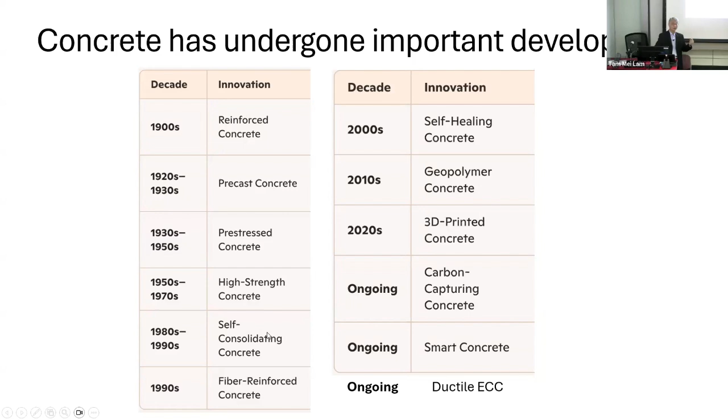Possibly reducing or even eliminating steel reinforcement in certain circumstances. So let me answer the question: well, we have steel reinforcement, so why bother? Why worry about tension? Well, we see in these pictures collapse of buildings under extreme loading, large earthquakes.

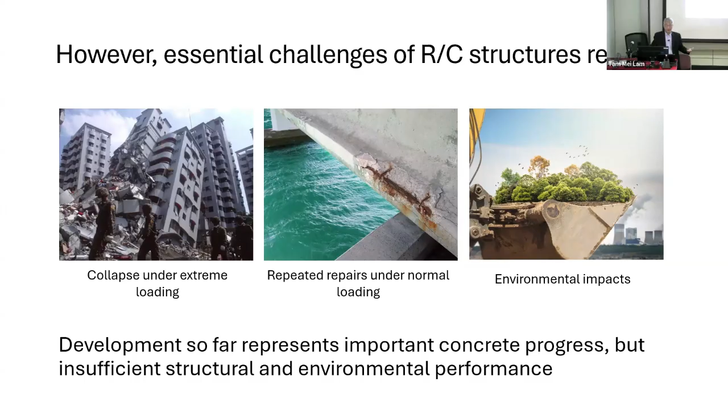And in more ordinary times we see this kind of deterioration of reinforced concrete. As I mentioned, nowadays we are very concerned about carbon emissions. So these problems remain, even despite the fact that we have a lot of developments, but the fact is concrete remains brittle. So what does brittleness of concrete bring to us or cause us in terms of problems?

I mentioned earthquakes, so you can see here actually a shear crack in this supporting pier on the lower floor of a building, despite the steel reinforcement inside. You obviously do not want to live in this building where the earthquake happened. And on the right-hand side here, you see this kind of cracking on floor slabs is very, very common.

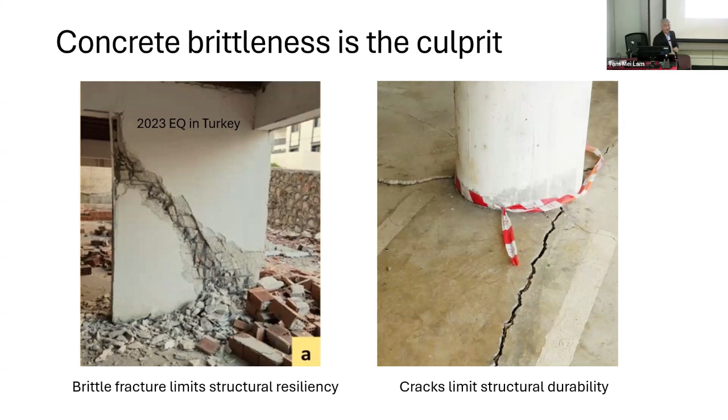And then water, or in the case of US, we use a lot of de-icing salts. That chloride ion goes in and attacks the steel and causes deterioration. So we have, on one hand, issues with the lack of resiliency in our infrastructure and the lack of durability. These are two important issues that we need to address if we are going to further advance our field.

So what we set for ourselves as a goal is to develop a new modern concrete that exactly attacks this brittleness problem of concrete material. Can we make a ductile concrete?

To be honest, I was told many times when I was in my younger days as an assistant professor that, 'Professor Li, you are being stupid. You're wasting your time. This is foolish. Concrete has always been brittle. Thank you so much. And you can't change that. That's the fact of life.' Again, you'll be the judge.

And you can answer that question later on, towards the end of the seminar, to see if we have succeeded in creating a ductile concrete. Now, what I want to precede before showing you the ECC in details is to say a few words about material development testing.

So we want to make sure that the concrete as a material is tested under conditions as close as possible to near-field conditions. That is more realistic.

So for example, in contrast to that, very often in laboratories, we see permeability study of intact concrete—a disk of concrete in the lab—trying to create a hydraulic pressure, force water through and collect on the other side. That is a measure of permeability, all right, but does it represent reality?

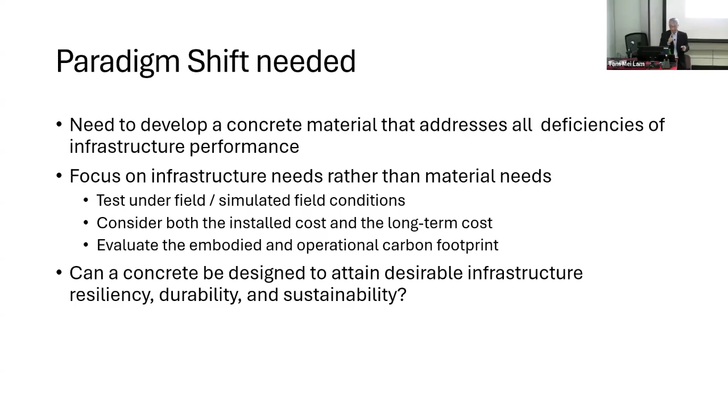So the question is, and you might think this is obvious, but if you look at research work done around the world, most research are done for just one of these three things, and that's not very good. We want all three characteristics enabled by one single material for infrastructures, leading to infrastructures that are resilient, durable, and sustainable.

All right, so here is the ECC that you have been waiting to see, if you have not seen this before. This is normal concrete, brittle under bending load. So you have elastic behavior and suddenly it fractures into two pieces. We are all familiar with that.

But in ECC, you actually allow the material to undergo plastic deformation. I put it in quotes because it's not actually like steel plasticity, but it is damage tolerant. If you look very carefully on the underside of this slab, there are micro cracks on the bottom. So the material is damaged, but despite the damage, the composite remains load carrying. It doesn't give up.

In that sense, it looks like metal plasticity, because after you have bent steel beyond the elastic stage, it can still have load carrying capacity. That's one of the reasons why we value steel as a structural material, it can go beyond the elastic stage. Now we have been able to create an ECC, a new version of concrete that has the same kind of behavior.

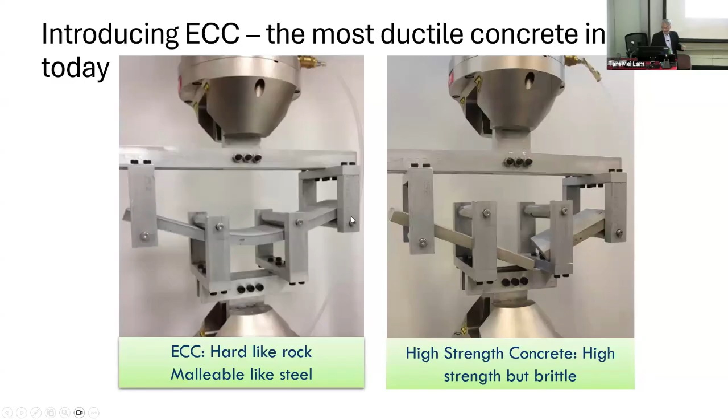If you look from the viewpoint of a tensile stress strain curve, a specimen loaded in direct tension, a piece of concrete will behave elastic, and then suddenly the crack forms and the load drops to zero, completely giving up load carrying capacity. If you put some fibers, fiber reinforced concrete, which has been around for years, you have this tail, a tension softening where a crack opens up, and as it opens, fibers bridge across, and they often break or tend to pull out, so the load carrying capacity continues to drop as the crack opens larger and larger.

In ECC, we have this funny behavior. You have an elastic stage, and then it undergoes strain hardening, tensile strain hardening. Despite the damage shown here, the material's load carrying capacity continues to rise. How far does it go? For this illustration, it shows about 3 to 5%. We can actually do even more than that. 3 to 5% is very large strain deformation, that's the reason why you saw that bent specimen smiling at you in that shape, because the material can undergo very large deformation.

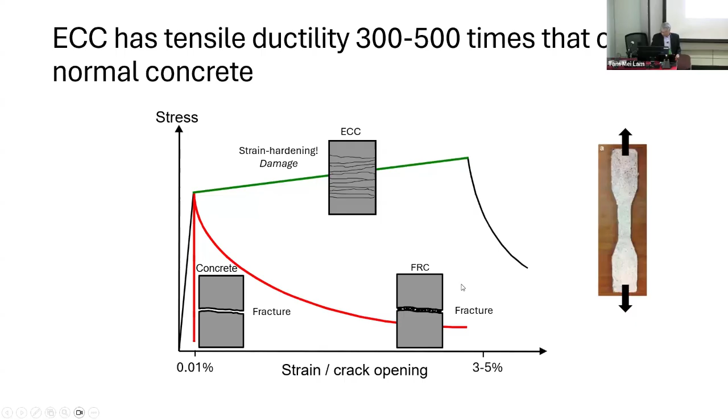Compared to normal concrete or FRC, which undergoes softening or sudden collapse at 0.01%, we are talking about not just a few times more ductile, but hundreds of times more ductile. So this is what we call tensile ductility, a ductile concrete. We have a stress strain curve that resembles that of ductile metal undergoing strain hardening behavior. All right, so that was an illustration of curves to compare different materials.

This is the actual test curve of one ECC material. This is a normal strength ECC, which shows about 4% tensile strain. I also included a UHPC material, which has higher tensile strength and compressive strength, reaching about 8 megapascal before it fails. When it fails, it shows very rapid softening, better than normal concrete because of the steel fiber typically included in UHPC.

So the value of this is very high compressive strength. We were often asked, can you actually make high compressive strength ECC? And the answer is yes. Several groups now, beyond our own research group, have worked on this. This picture, I believe, was taken from a group at Tongji University. But there are many other groups now that have been able to produce ECC with very high compressive strength.

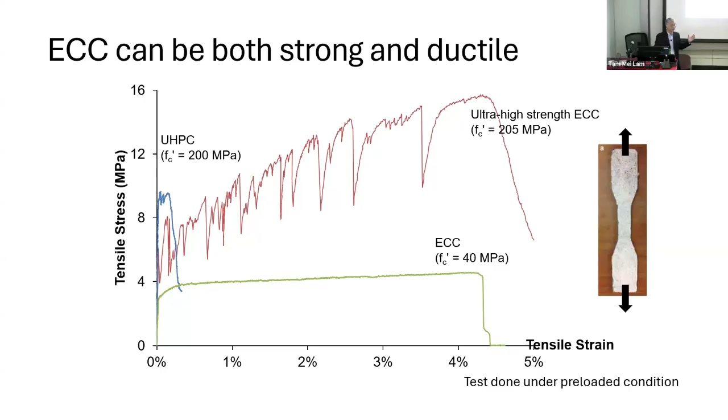And the tensile strength remains like this, so it has very ductile behavior, maintains the high ductility. This is achieved with a now newly available fiber, PE fiber, which has now gone substantially down in cost. It used to be a novel material which is interesting academically, but now it becomes affordable. It becomes real, it is actually used. And I'm going to show you some examples of applications, as I promised.

Now that is very important, and I emphasize that because it's critical to durability of infrastructures. You see that durability, or conversely, the degradation of infrastructure, is strongly related to the width of cracks in the structure under surface.

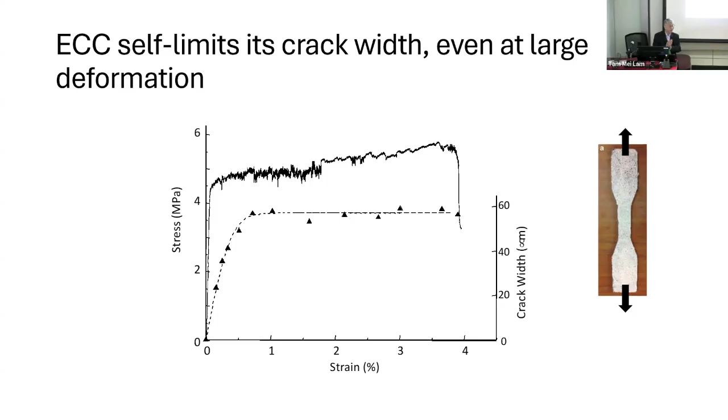I hope this short video shows this. So the tight crack width is obviously valuable for durability, but it also has this interesting characteristic: if the material or the infrastructure is exposed to air and rain, this is what happens - it repairs itself. So this is self-healing of the material.

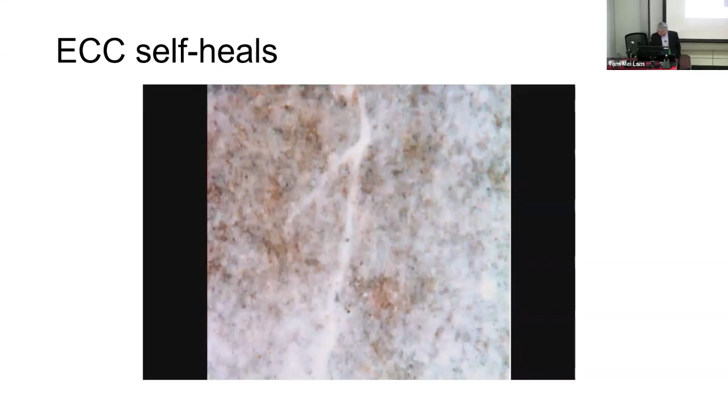All right, so let me quickly jump to talking about the three characteristics that we value. We want high durability in our infrastructure, damage tolerance and creating resiliency in our infrastructure, and low carbon footprint, both embodied carbon and operational carbon. Let me show you the details, a little more, illustrated with examples.

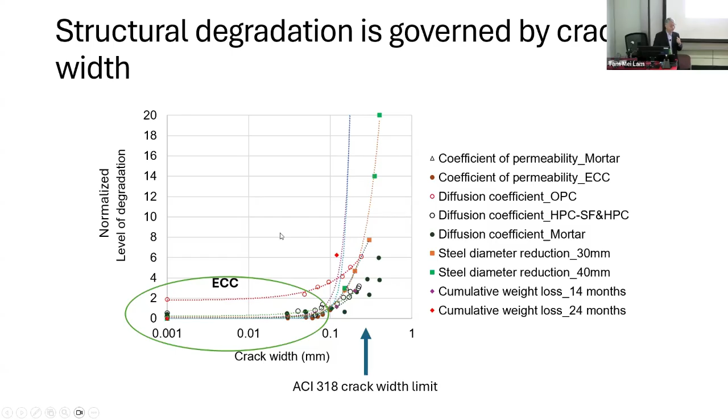The problem remains here in terms of durability. So the reason I'm showing you this chart is that in ECC, as you saw a moment ago in the test curves, crack widths are intrinsically controlled to less than 100 microns. The stress-strain curves and stress crack width curves all show less than 100 microns, around 60 microns. This is intrinsic in ECC. You don't have to count on steel reinforcement to achieve high durability.

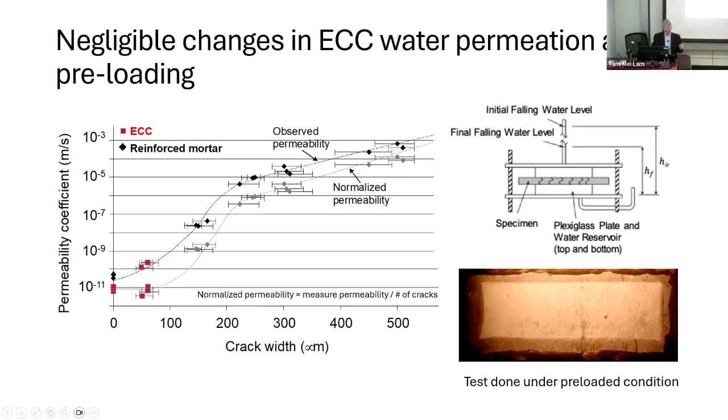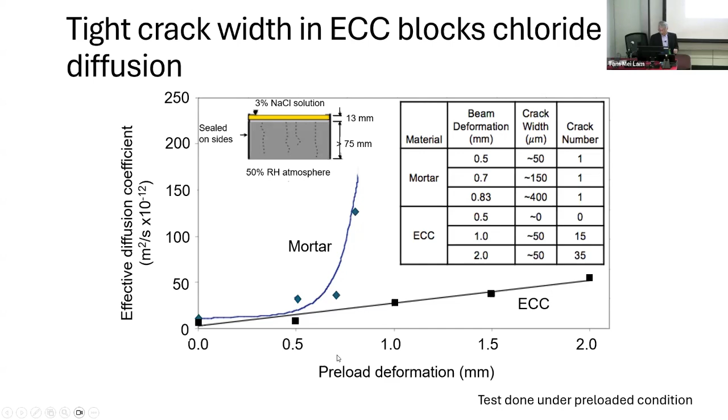Now that's permeability, but you can do the same kind of study with regard to chloride penetration. We did this by deliberately loading the specimen under bending before exposing it to a highly concentrated chloride solution. The effective diffusion coefficient responds to preload deformation. For the mortar, it goes up very, very fast—with the increase in crack width as you bend the specimen, the chloride diffusion rate goes up high. In ECC, it also goes up, but in a more linear fashion. This is because as you increase the load and cause larger deformation, the crack number increases, but the crack width stays constant, as you saw a moment ago. Despite large deformation, crack width remains low in ECC—that's an intrinsic property.

These two test curves demonstrate in the laboratory, simulating field conditions, the reason why ECC can be very durable for infrastructure. So let me jump to real life applications, as I promised at the beginning.

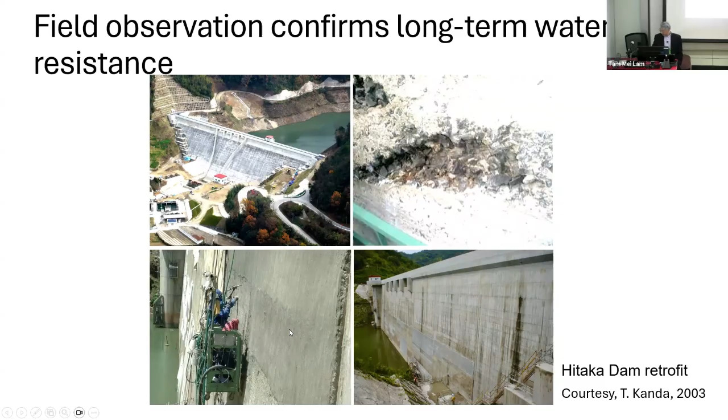This is a very early application in Japan, carried out by one of my former students, who is leading a team of engineers at Kajima Corporation. You can see the date there—it's over 20 years now. This application involves the use of ECC for surface coating of a dam which was leaking, with erosion of the old concrete. The repair was done by shotcreting ECC onto this layer, and it has remained just as good as before, even after 20 years.

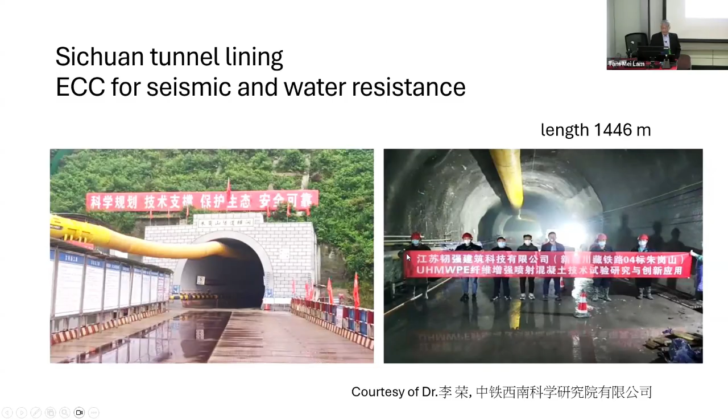This is another application much closer to now, carried out a couple of years ago in Sichuan, China. I ran into Dr. Li Rong a couple of months ago, and he showed me these images he took. This is a use of ECC, again by shotcreting, as a tunnel lining. These are some of the parameters you can see, but what he discovered after a few years of experience is that this ECC tunnel lining remains watertight. It demonstrates high resiliency against earthquakes, durability and crack control, and even control of the surface finish, which they like to have. These are some advantages, and the reports after a few years of use remain very good.

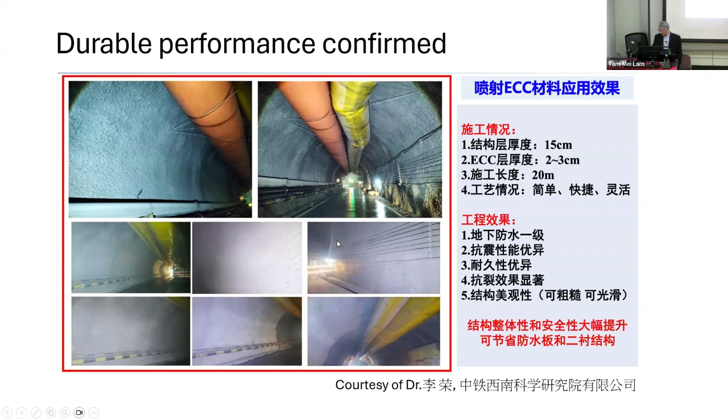Some of you in the audience recognize that - this is me, believe it or not. This is a tunnel lining, actually a cave-in. The idea is to use ECC as a single pass permanent lining. There are a number of reasons this study was carried out in Hong Kong, one of which is much higher speed construction, reducing construction time. In Hong Kong, time is worth a lot of money.

So these are some... oh, I forgot I have a video. So this is spray ECC.

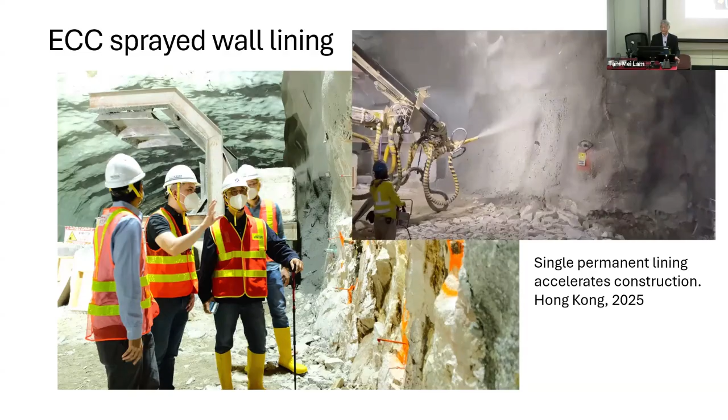So back to mainland China. This is another application carried out by one of my former students at Tsinghua University. Professor Zhang unfortunately passed away during COVID, but the work was continued by one of his former students, now at this Bridge Research Center. The idea is to use ECC as the top layer of this viaduct, particularly at locations where the slab experiences negative moment, so you have tension on the top layer, and ECC is very good at taking tension. This was carried out in 2021 and it remains very good.

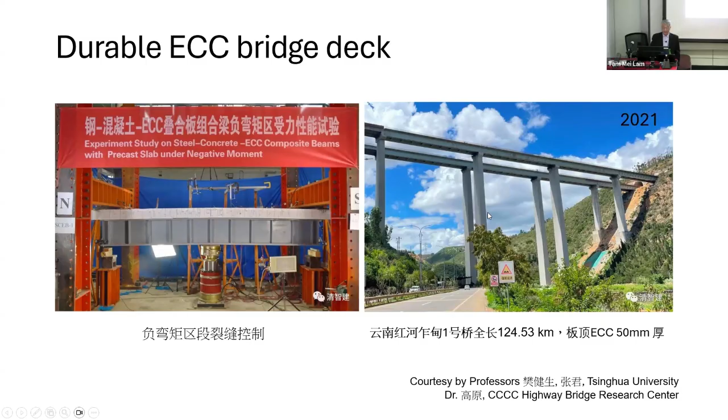I spoke with this, and here's another example of similar kind. I feel like I should show you something from the US, since that's where I have worked for many years. This is an interesting use of ECC - an example comparing ECC with UHPC and a non-shrinkage grout that they have been using, in a study carried out by Virginia DOT in 2018.

Dr. Celik told me they have problems with leakage of their typical grout, used to grout the connection between these steel box beams fit together by shear keys and used as a bridge slab overall. They get water leaking through these joints causing durability problems. So they were looking for a solution, and in this study they used conventional grout, UHPC, and ECC. What they reported was that ECC was the only grouting material that did not have any sign of leakage - all the others had leakage problems.

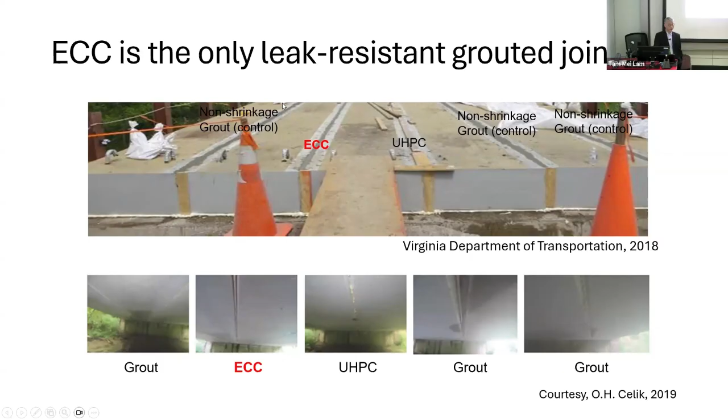And it's not surprising - UHPC is very strong in compression, but in this application compression doesn't play a role. It's crack control, crack width control. It is shearing the keys, but shear at a 45-degree orientation turns into tension, diagonal tension. So this is obvious, you would say, and I agree. Once you have a problem with tension, it's tensile capacity that matters, not compressive capacity.

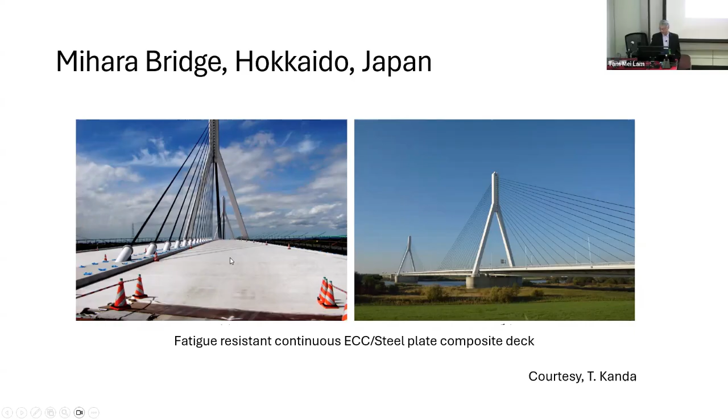This is an early use in Japan of ECC on a composite bridge deck in Hokkaido. It's a beautiful site - there's a steel plate on the bottom, and they overlay the ECC. In this case what's interesting is there are no expansion joints. It has been in operation for, I believe, 20 years - I forgot to put the date there. So again, early use, demonstrating durability of ECC. I have to admit it's not 100 years of experience, this is a relatively new material, but these are some images I have showing infrastructure in use a bit longer.

But so far so good. Now let me switch to structural resiliency. These are recent pictures - ECC is now used in many parts of mainland China in this context. Many houses are built as masonry and often do not meet design code requirements, so they are in danger when there's a big earthquake, and the government is very concerned. So they require retrofitting - not repair, but retrofitting, upgrading the seismic resistance of these houses. There are lots of them, and people are living inside, so it has to be done very quickly.

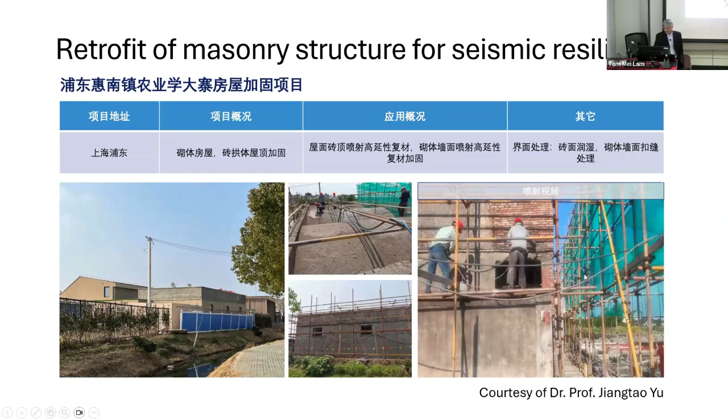Let me see if I have more pictures like this. Here's another one, a different location in Xi'an, and you can see the use of ECC on the outside of these walls. I was told there are now over 4,000 houses already retrofitted. So ECC is no longer a novelty in mainland China - it's something they are using, and they are upgrading the quality, hopefully saving lives during the next earthquake.

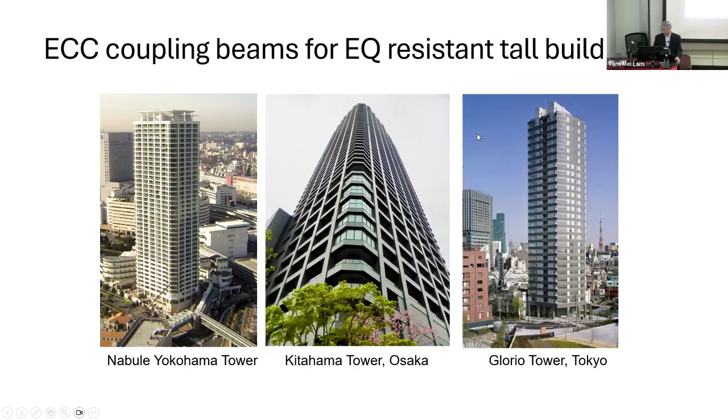By making use of ECC, in these coupling beams in the core of the building, it actually reduced the cost of these buildings and allowed construction to be much faster at higher speed.

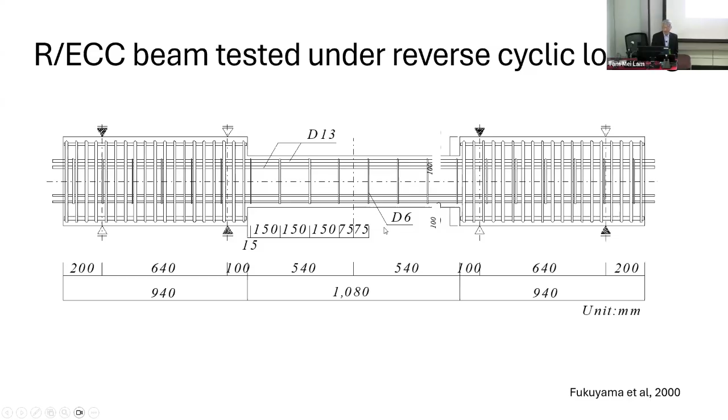This is a test, some of the many tests that was carried out before they were allowed to use ECC. This is a fully reversed cyclic shear loading of the beam in the middle, compared with regular reinforced concrete beams. You can compare the two after the same kind of loading. The full reversal is responsible for the two sets of diagonal cracks.

With the reinforced concrete, the cracks become so large that they expose the steel reinforcement, whereas the reinforced ECC has very tight crack widths. In fact, if the student did not paint the micro cracks, it's very hard to find them.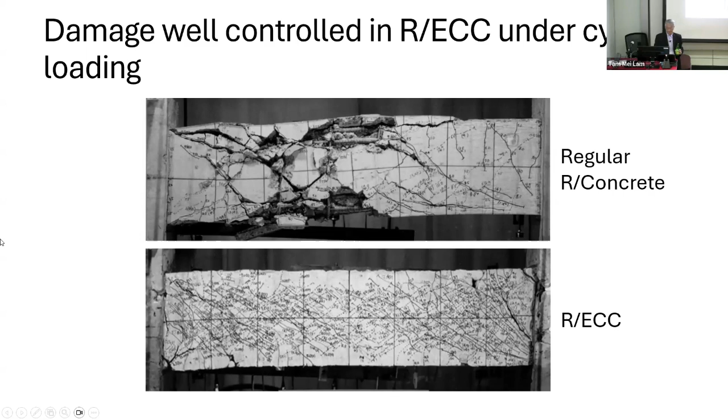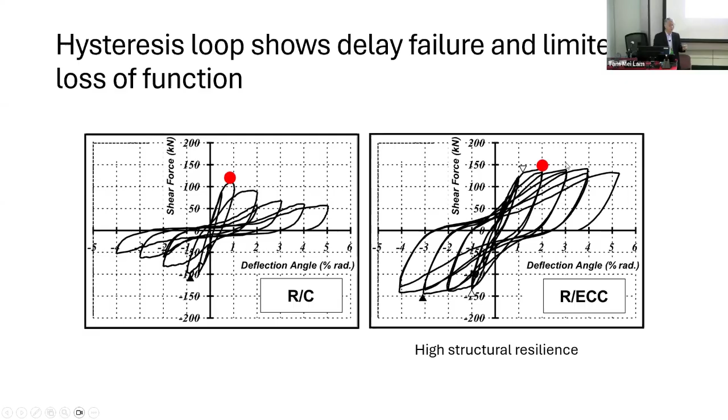And of course, energy absorption is characterized by the area under these hysteresis loops, much bigger than the pinching behavior in reinforced concrete. These kinds of tests gave structural engineers the confidence to actually use this ECC material in full-scale buildings. I don't mean to say it's very easy, but they were very, very careful and went through many different tests, including fire tests and so on, before they were allowed to use it.

So it looks like this. The ECC coupling beams were used, four pieces on each floor, and this is in the building core. By the way, one of the driving forces behind this design compared to what they had before was the fact that they put all the load carrying elements in the core of the building, in the center core. So the outside part has very little structural elements.

I actually went up to this building before it was completed, and I was very impressed once I exited the temporary elevator. It was just sheets of glass, everything has no blockage of views, no big columns, because everything is in the core.

That was one of the driving forces. And after my visit, I was told, 'Professor, I don't think your salary can afford a unit here.' I have to agree with that, it's very expensive. But if you ever visit Kitahama in Osaka, there's a subway station there. You exit at Kitahama subway station, and then you go upstairs. That's the building.

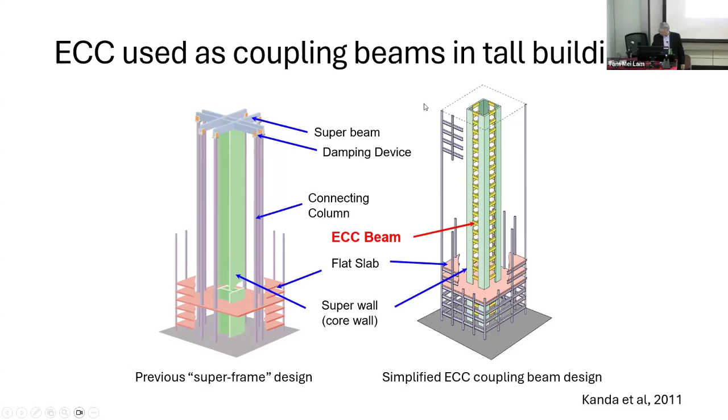So these are the coupling beams. They were created in precast yards before they were installed on each floor of the building. I took this picture - these are the coupling beams and the elevator shaft inside there. And that's what it looks like. It's a beautiful building.

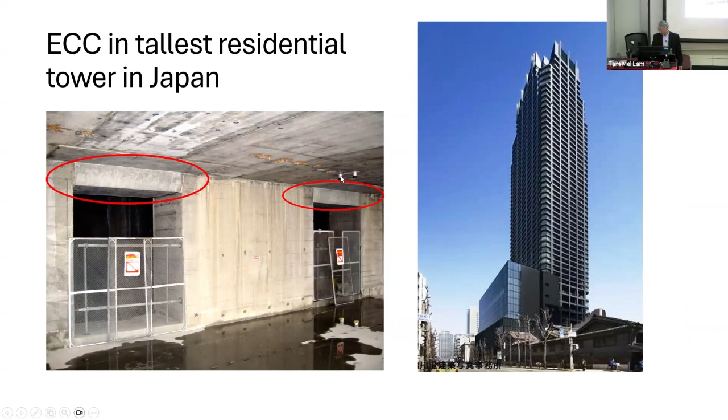Now, let me switch to another use of ECC. Again in Japan, along the East Coast, a viaduct runs along this coastline. I show you this example because it's a very good example where multiple characteristics of ECC were utilized. Guess what they were? Obviously, you would say high seismic resistance is important. It's in Japan, so that's the easy guess.

But what else is important in these applications besides seismic resistance? Look at the right-hand side picture. Corrosion, right? Coastal exposure to an aggressive environment. Look at this seawater here - this is salt water running along the east coast of Japan.

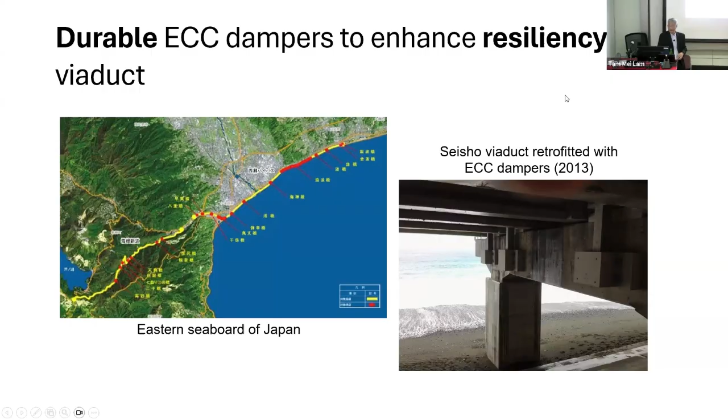So they had used steel as dampers to try to reduce the relative motion of the bridge deck sitting on the piers. What they were worrying about is the relative motion being so big during an earthquake that it just drops off. So reducing this relative motion is important, and they used the concept of dampers to reduce this. Steel dampers were used before, but they all corroded. So they used ECC with no steel, and that's what it looks like.

About 1,000 pieces of these ECC dampers were used along the many kilometers of the viaduct.

All of these are precast in a precast yard and brought to site and installed. You can actually see the installation.

It has two components. One looks like a T shape, and the top part of the T is anchored into the deck, becoming part of the deck. The bottom part of the damper is like a pocket, anchored onto the top of the pier. The two parts interact with one another. When the deck tries to move, this portion becomes like a beam, undergoing bending, and is blocked by the pocket below. This reduces the relative motion. That's the very simple concept of creating the damper.

In this case, it's making use of the structural resilience, damage tolerance of ECC, as well as the tight crack width, leading to durable infrastructure. Both of these are important in this application.

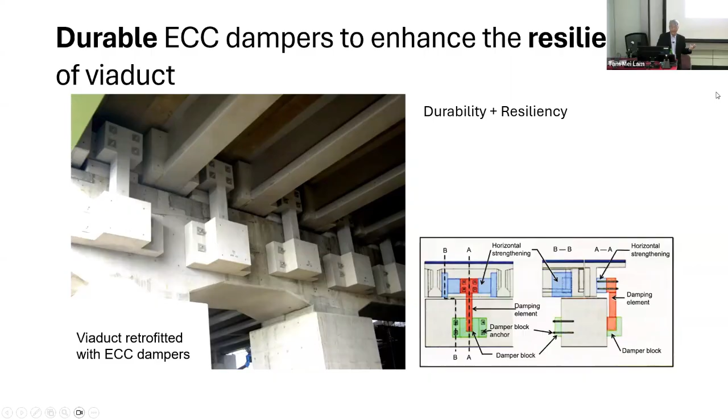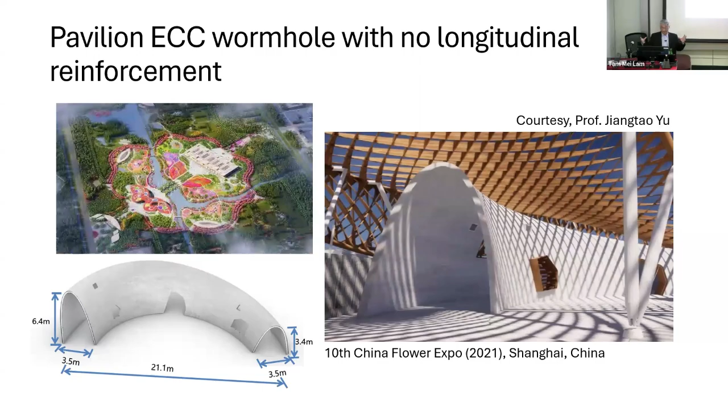I can't avoid this. This is not a big structure, but I really like it. It's shared with me by Professor Yu Jiangtao in Tongji University. He created this, what he called a wormhole, in a pavilion in Shanghai. It's very pretty looking, and what is interesting from a structural viewpoint is that there's no longitudinal reinforcement in this sculpture, if you will, structure. It was tested by very heavy steel balls, and it passed the test and then was created. It looks very pretty to me.

Okay, let me switch over now. I talked about structural infrastructure durability, infrastructure resiliency, and now I switch to infrastructure sustainability, focusing particularly on carbon emissions.

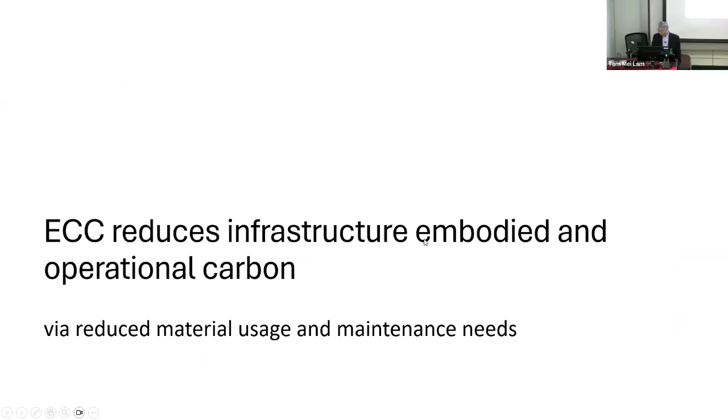Just in case you missed what I defined earlier, embodied carbon is the carbon emission associated with either the material during the production of the composite, the ECC, or the installation of the structure at the beginning of service life. That's what I define as embodied carbon.

Operational carbon is after your structure is put to use, and then it undergoes repeated repairs. Those repairs cause emissions because of new material usage, because of the traffic congestion created as a result of repair requirements, and so on. This comes at a later stage of the life cycle of an infrastructure. Embodied carbon comes at the beginning stage of the life cycle.

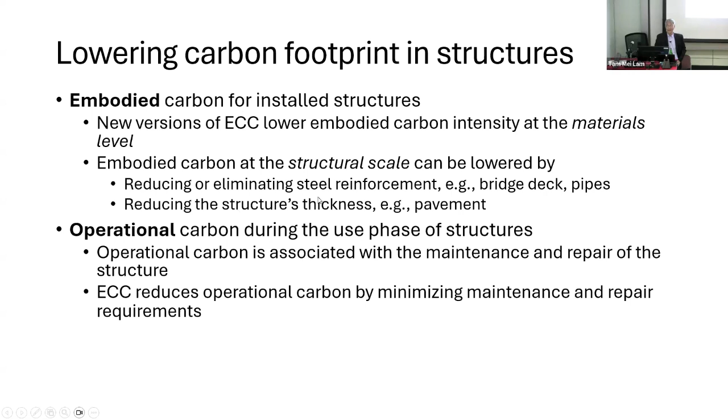And embodied carbon, let's start with the material itself. I'll be the first to admit that when we first created ECC, we created M45, another material in the research group in those days. But M45 became a more or less standard material. Lots of groups did studies on it. It's actually very good in terms of durability and in terms of damage tolerance, ductility.

But when you measure the carbon footprint, it's not very pretty. It actually went up a lot, and it's easy to understand why. We eliminated the coarse aggregates and replaced them with cement - that's terrible, right? And then we used plastic fibers, synthetic fibers, made from crude oil. So it's a double whammy in terms of carbon emission. That's why it went up so much.

But since then, a lot of different groups, including our own, have studied different versions of ECC and essentially brought down the carbon emissions to about the same level as normal concrete. In fact, this last point here was created by one of my latest students just before I retired, now at National Taiwan University. He was able to drive down the carbon emission to below that of normal concrete.

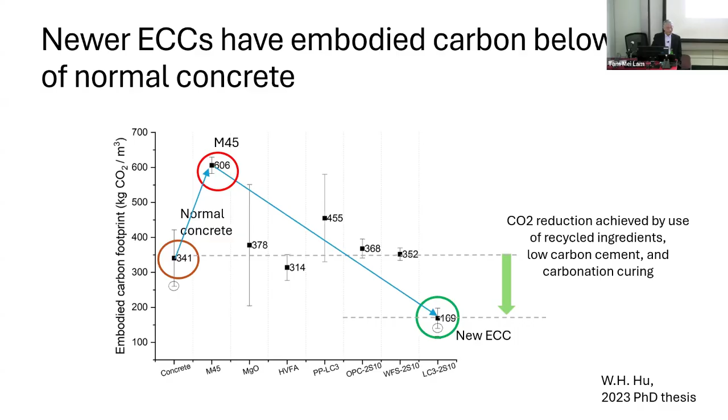Now, what about if you move from the material to the structure? I have calculations for a very simple structure: a reinforced concrete pipe with steel reinforcement inside, compared with an ECC pipe. Notice that for the ECC pipe, because of the tensile ductility, it does not require steel reinforcement. So we remove the steel reinforcement and thin down the wall thickness.

Reducing the wall thickness, as a result, reducing the amount of material required. And yet, with these changes, elimination of steel reinforcement, thinning down the pipe wall, it actually performs better under diametric loading. Instead of brittle collapse into quarters, as in the case of steel reinforced concrete, it actually deformed into an oval shape.

What I don't have time to show you is that we also did permeability studies. So we put water inside this greatly deformed pipe. The water did not leak.

Amazing, we were surprised. Now, what I really want to show you is that if you compare the carbon footprint of these two structural elements, very simple structural elements, if the concrete is 100%, then the reinforced concrete is 100%. The ECC pipe is reduced to about half of that. Okay, how is that possible?

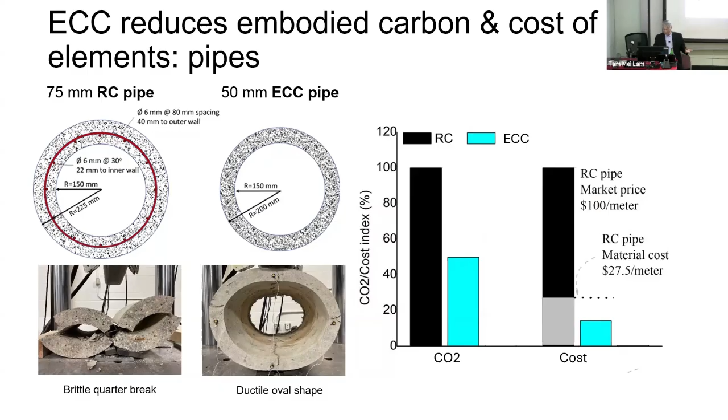Because the flexural strength of ECC is more than double that of normal concrete. So no steel reinforcement, lower thickness, and in fact no expansion joints, no cut joints required—the material ductility takes care of that.

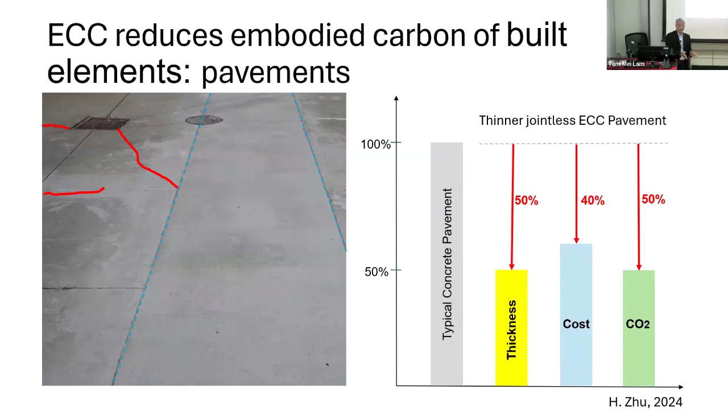It also reduces the cost, labor cost, and improves reliability. Reducing 50% in thickness brings down the cost, brings down the carbon emission. So this is reduction of embodied carbon at the beginning of the service life, in this example of the pavement.

What about long-term behavior? I need to use an example that was done many years ago—in fact, I believe 2005. This was the very first test of ECC in the field, carried out in collaboration with the Michigan Department of Transportation, MDOT.

So they expressed to us that they experienced problems and cost in both performance and cost because of the failure of the expansion joints on bridge decks. They needed to repair those joints every summer, which was expensive to them. So what they wanted was a more permanent solution.

What we suggested is to remove the expansion joint, the steel expansion joint, remove some portion of the adjacent concrete slab, and replace the whole thing with an ECC link slab. Why do we want to do that? Let's see if the schematic shows.

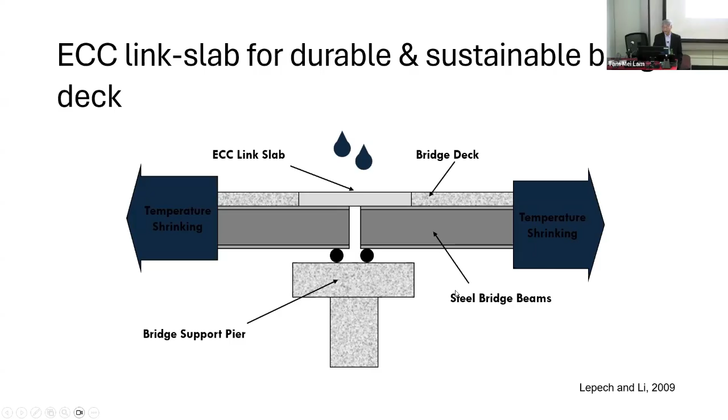ECC is stretchable, it's deformable. So it serves the function of an expansion joint when temperature goes up and down. It needs to stretch and it needs to contract, and ECC has no problem doing that. It might have micro cracks, but they are very tight, so it still serves the function of a joint.

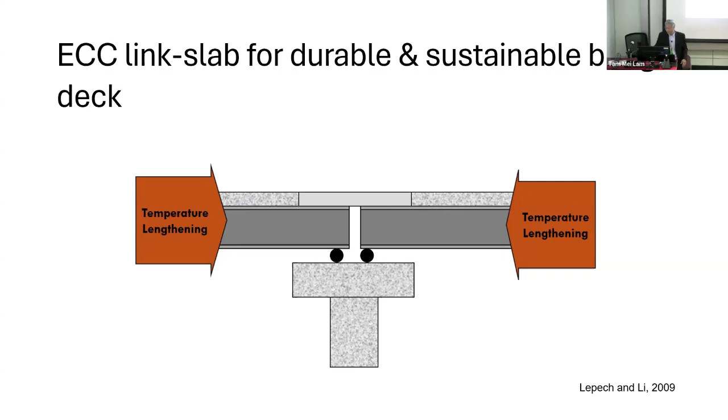But if you ever drive on this bridge deck, you'll say to yourself, there is no expansion joint. Why? Because it's so quiet. Normal expansion joints, when you ride on them, go boom, boom, boom—every time your car wheels hit the expansion joints. You don't have that anymore. It's completely quiet, like a continuous deck on the surface, except for a slight color difference.

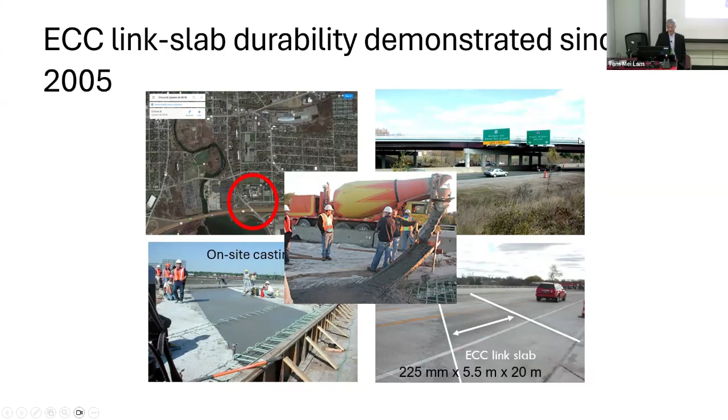If you ever visit where I used to live—I no longer live there—but you'll be using this highway from the airport to Ann Arbor in Michigan, and your car will go under this.

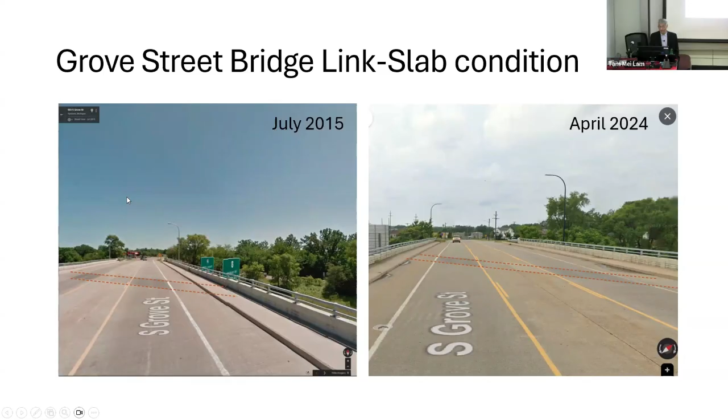These images I borrowed from Google Maps, and they show the ECC link slab still in good shape after 20 years or so. I showed you this example not so much for durability, but the fact that

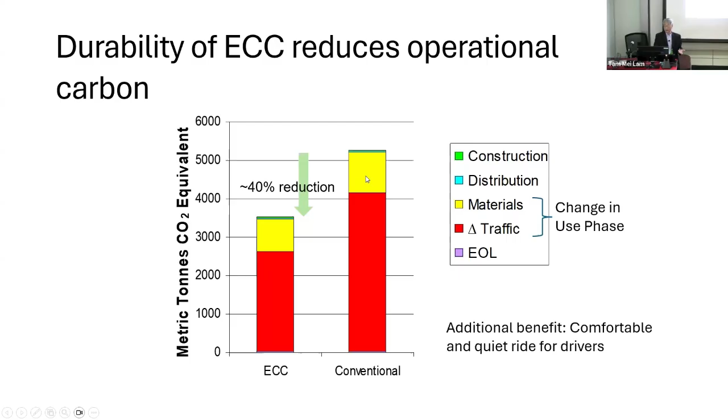But what was surprising to some was that the yellow color also becomes smaller. This is material. At that time, ECC was not green at all. ECC was very brown, as I mentioned. The M45 is not very green at all, I should say. So how is it possible that we have reduction even on the material aspect of the calculation? Well, again, because we have fewer repair events, you end up with less material required over, in this example, 60 years of service life, using this calculation.

So you end up having a lower amount of emitted carbon in the operational phase. Just to summarize, I talked about durability, led by the fact that ECC has very tight crack widths. It's very durable in many different environments we have tested.

I don't have time to show that, but some of you may be interested to go deeper. I'll show you, hopefully I have the book - there's a book I wrote on ECC which summarizes all of these details, you can find them there. But essentially, durability of infrastructure is brought about by the fact that ECC has very tight crack width control by itself, not depending on steel reinforcement. This is important.

Now, high damage tolerance I have mentioned many times - this is what leads to enabling of highly resilient infrastructures against heavy loads like earthquakes. And then the last point is low carbon, which I already mentioned so I won't belabor that. So it's possible to have all three characteristics making use of one single material, ECC.

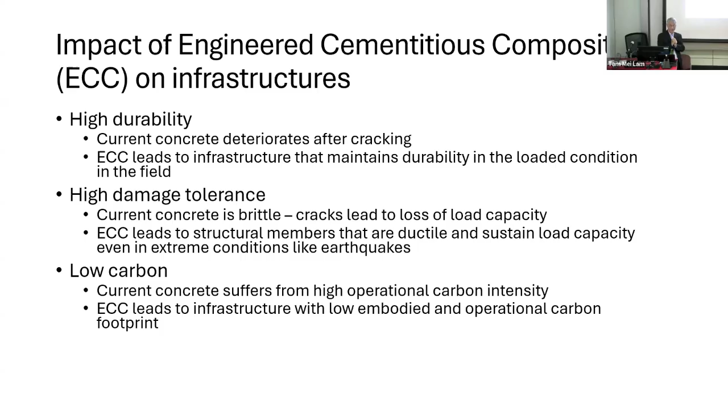Summarizing all these ideas, ECC material enhances infrastructure resiliency, durability, and sustainability. Notice that I keep emphasizing infrastructure resiliency, not just high strength material. I emphasize infrastructure durability, not just laboratory durability of a small piece. And infrastructure sustainability. Why do I emphasize that?

Instead of just focusing on the material, I focus on the infrastructure, because that's what we use. We use bridges, we use buildings. We don't use concrete exactly in our daily lives - do you drive concrete? You drive on roads, right? We have this beautiful building, we have a seminar in a nice room here in this building, so we use the building, we are not using concrete. So the building has to be resilient, should be durable, and should be low carbon. That's what we really should drive for.

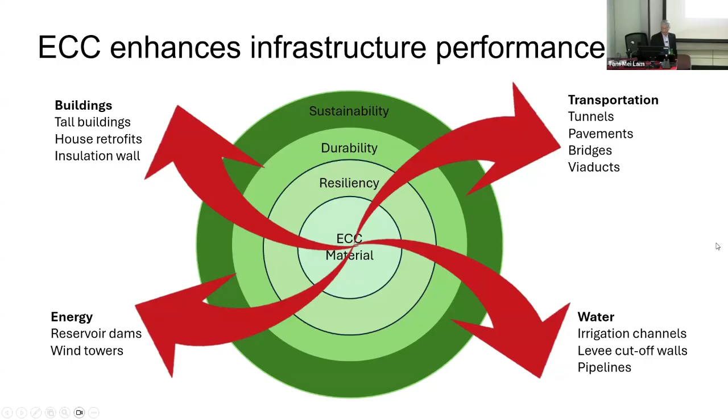So far we have discussed the material, and obviously I don't have time to cover all of it, but in summary, it's already used in the transportation sector, the water sector, the energy sector, and the building sector around the world. A lot of it in Europe and the US early on, but then it moved to Japan, and now mainland China is taking it up, with some applications also in Singapore.

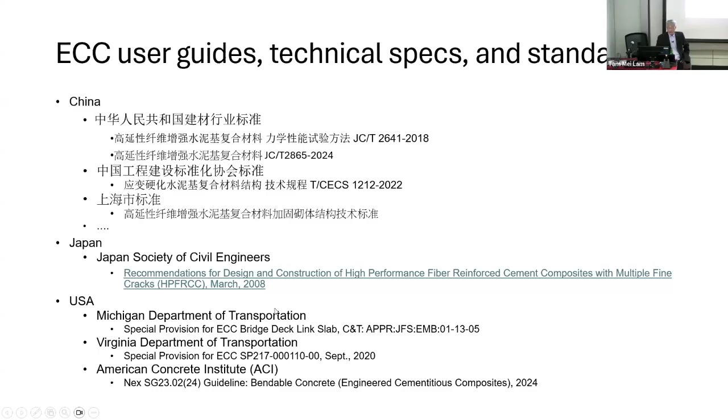Accompanying the adoption of this new material, and it's very necessary, are the creation of standards and users' guides. There are already a number of these, both industry and regional standards in China, helping to drive adoption of the material. In Japan, they published the very first user's guide of the ECC material, and the US also. Some of these things are interesting to look at.

Our chairman, Roy, just mentioned the establishment of a subsidiary under CCPA, and I happen to be there. So you have the honor to initiate the establishment of this subsidiary. Just how long ago was that? Maybe a couple of months ago in Guangzhou.

So I guess this is the question in many of your minds: is Hong Kong ready for ECC? Why is it not used? I feel that it does require some thinking, but I think the short answer is yes, Hong Kong is ready. There is no reason why not, if I want to put it that way. There are already 2 ready-mix plants that have experience in mixing ECC material, and there is some limited field testing of the material.

I think there should be more, but I hope it's coming along. What's also very important is that at least 4 local universities here have been doing research in ECC, and I think the fact that we have these human talents is extremely important. We have that in Hong Kong. So of course we need to have the research translated into applications, and that requires collaboration between academics and industry. I think we are at that juncture now.

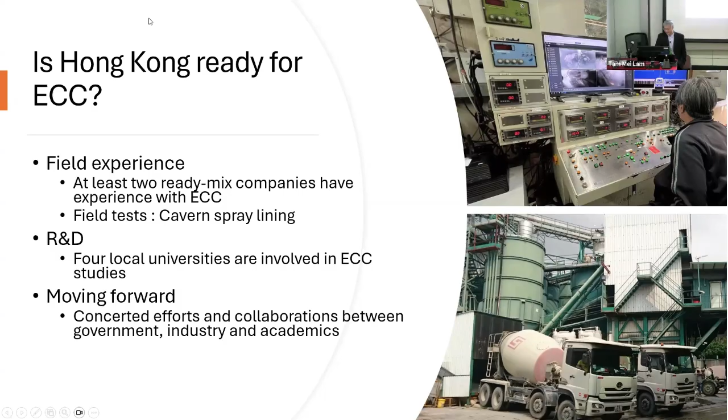Okay, so much for that. Let me draw a conclusion. I think you have seen in this presentation actual field use of the material. It's not just an academic study. The material has gone to various industrial sectors around the world, not just in the US, but also in Japan and other places. The idea is that the material can be translated into enhanced structural durability and resiliency, and in many cases, increasingly improving construction efficiency, like reducing the amount of time for construction or tunnel lining, for example.

Reducing carbon footprint - in mainland China, this has become a very, very important driver to green the technology, to green the construction industry. They really want that. And I think we can deliver also on that.

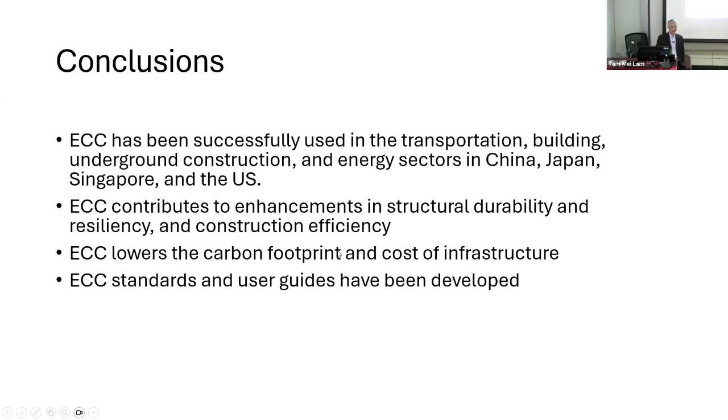So there are some standards and user guides that we can rely on, but I believe we should develop our local standards. Many of you in the audience have much stronger expertise than I have in that regard, and I'm hoping that we'll see that happen very, very soon.